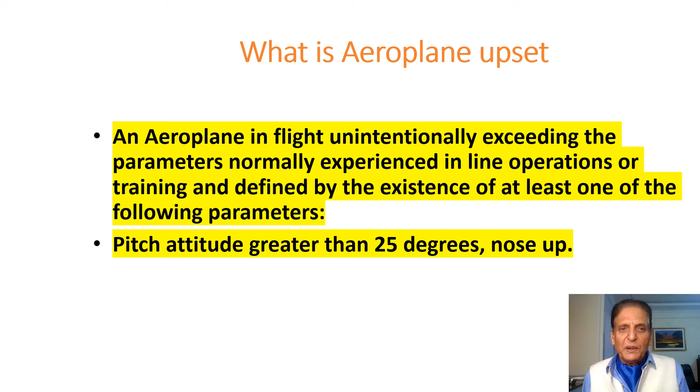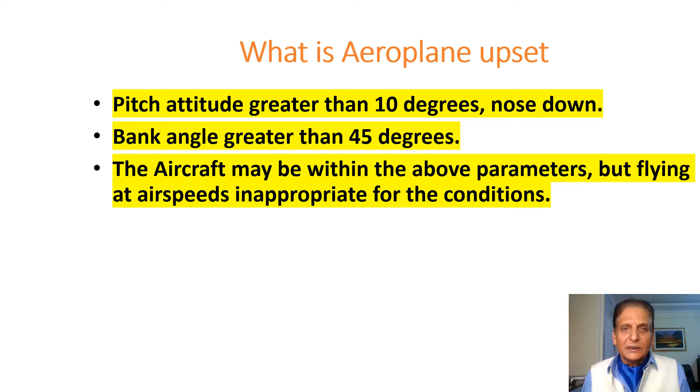First, we shall discuss what is aeroplane upset. An aeroplane in flight unintentionally exceeding the parameters normally experienced in line operations or during training and defined by the existence of at least one of the following parameters. First one is pitch attitude greater than 25 degrees nose up, pitch attitude greater than 10 degrees nose down, bank angle greater than 45 degrees. The aircraft may be within the above parameters, but flying at speeds inappropriate for the conditions.

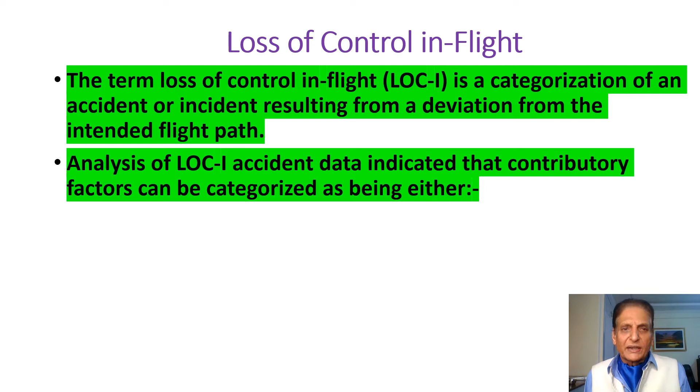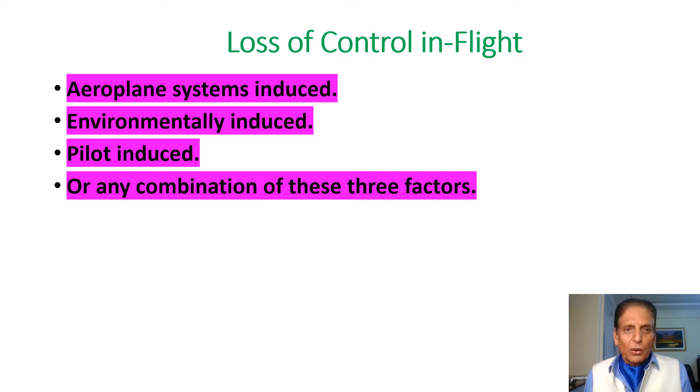Now we shall discuss loss of control in flight. The term loss of control in flight is a categorization of an accident or incident resulting from a deviation from the intended flight path. Analysis of loss of control in flight accident data indicate that contributory factors can be categorized as being either aeroplane systems induced, environmentally induced, pilot induced, or any combination of these three factors.

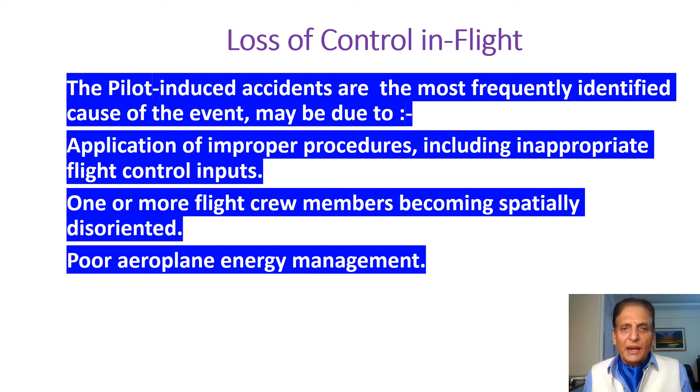The pilot-induced accidents are the most frequently identified cause of the event. May be due to application of improper procedures, including inappropriate flight control inputs, one or more flight crew members becoming spatially disorientated, and poor aeroplane energy management. One or more flight crew members being distracted, improper training, intentional low flying, heavy airplane wake and clear air turbulence, severe weather turbulence, and icing conditions.

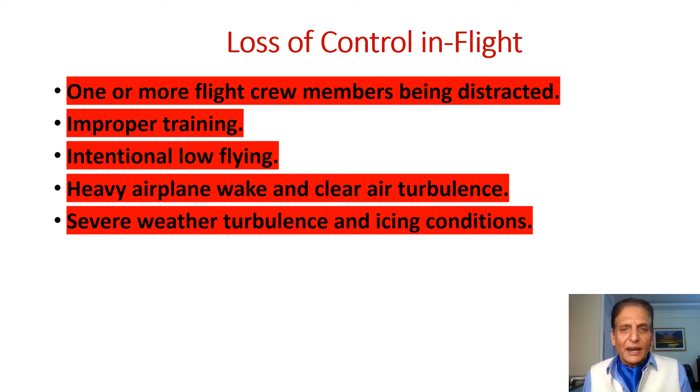Now we shall discuss threat and error management. Threat and error management is a method used to help maximize safety margins and minimize risks by first identifying threats to successful operation accomplishment and then determining ways to mitigate or eliminate the identified threats. The threat and error management concept is to have pilots consider not only the external influences that impact safety, but also to consider their own reactions to those influences as well as mistakes they make in the conduct of a flight.

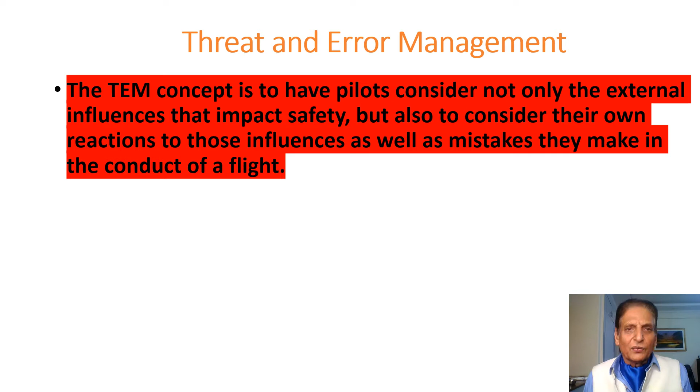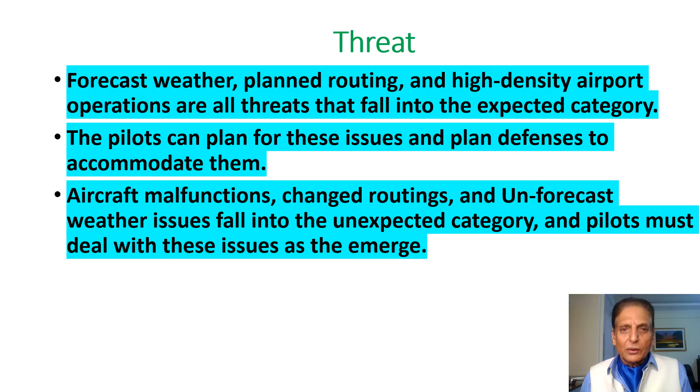Now we shall talk about threats. Threats are those events that are beyond the control of the pilots, which increase flight complexity, requiring flight crew management and attention. Threats are further divided into expected and unexpected. Forecast weather, planned routing, and high density airport operations are all threats that fall into the expected category. The pilots can plan for these issues and plan defenses to accommodate them. Aircraft malfunctions, changed routings, and unforecast weather issues fall into the unexpected category, and pilots must deal with these issues as they emerge.

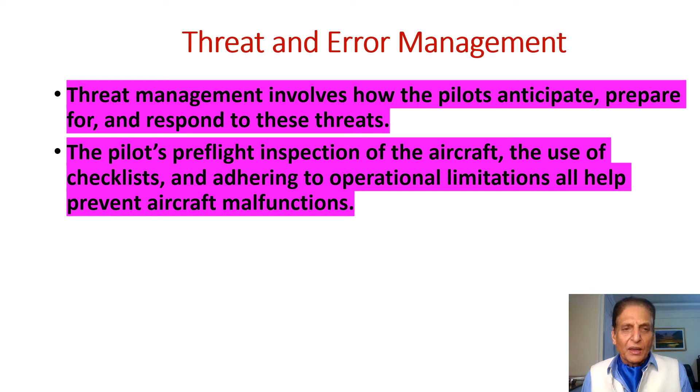Threat management involves how the pilots anticipate, prepare for, and respond to these threats. The pilot's pre-flight inspection of the aircraft, the use of the checklists, and adhering to operational limitations all help prevent aircraft malfunctions. A thorough weather briefing, use of airborne weather radar, and periodic in-flight weather updates are all parts of managing threat due to weather.

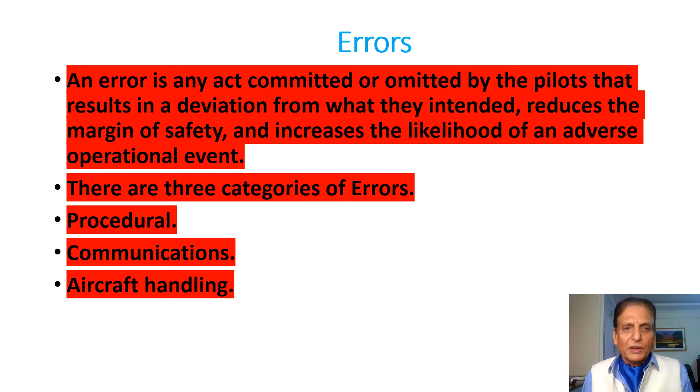Now we shall talk about errors. An error is any act committed or omitted by the pilots that results in a deviation from what they intended, reduces the margin of safety, and increases the likelihood of an adverse operational event. There are three categories of errors: procedural, communications, and aircraft handling. Procedural errors involve pilot divergence from policy, regulations, aircraft flight manual standards or procedures. Examples include accidentally missing a checklist step or purposely omitting said step.

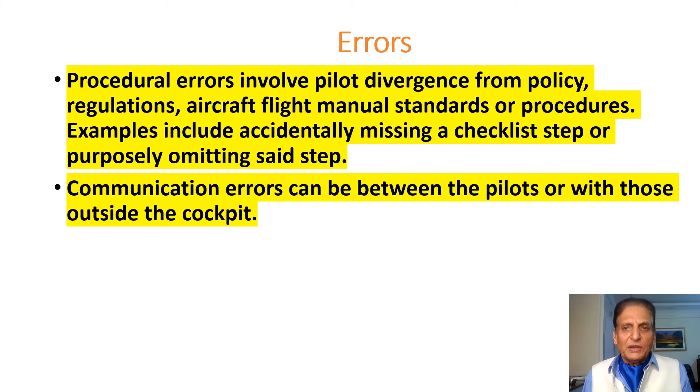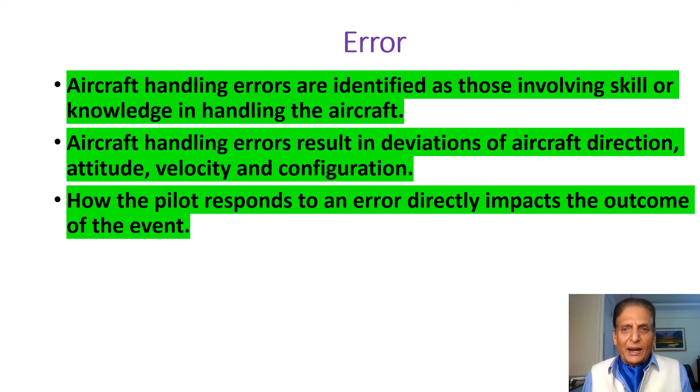Communication errors can be between the pilots or with those outside the cockpit. Aircraft handling errors are identified as those involving skill or knowledge in handling the aircraft. Aircraft handling errors result in deviations of aircraft direction, attitude, velocity, and configuration. How the pilot responds to an error directly impacts the outcome of the event. First of all, the error must be detected. An error that is not detected cannot be managed.

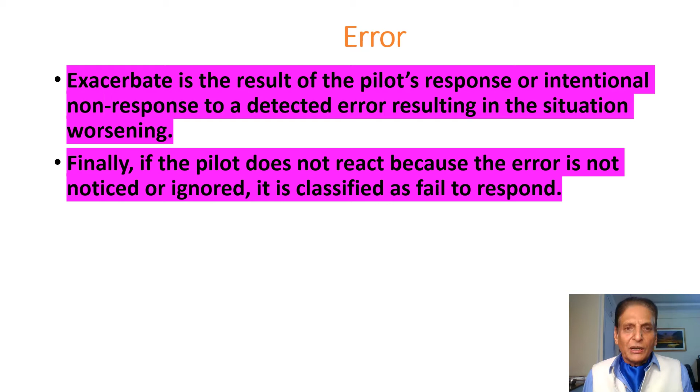If the pilot detects the error and the error is managed appropriately without additional error and without significant effect, the error is said to result in a trap. That is, the error has been trapped. Exacerbate is the result of the pilot's response or intentional non-response to a detected error, resulting in the situation worsening. Finally, if the pilot does not react because the error is not noticed or is ignored, it is classified as fail to respond.

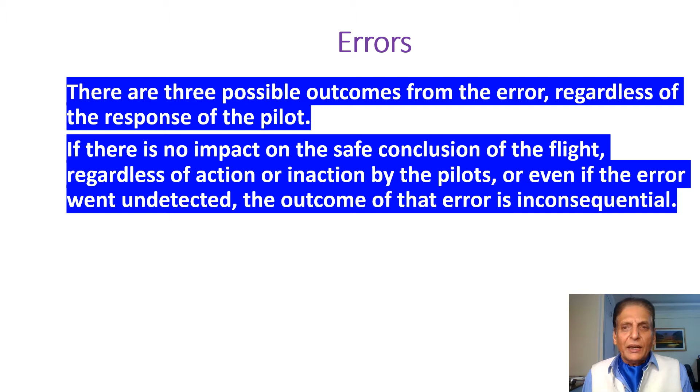There are three possible outcomes from the error, regardless of the response of the pilot. If there is no impact on the safe conclusion of the flight, regardless of action or inaction by the pilots, or even if the error went undetected, the outcome of that error is inconsequential. The pilot, in responding to this error, might commit an additional error, and that error must also be detected and managed by the pilot. Third and most critical is the pilot's response, which may result in an undesired aircraft state.

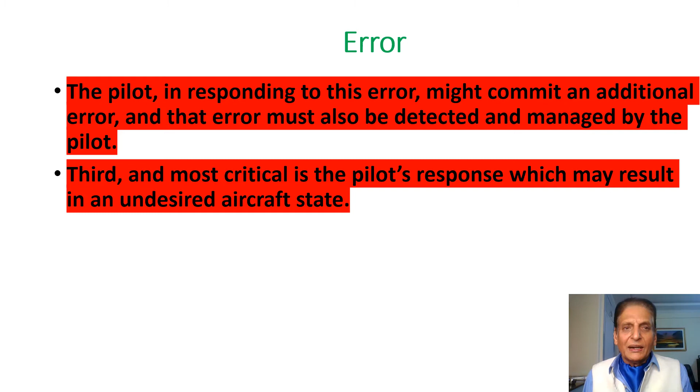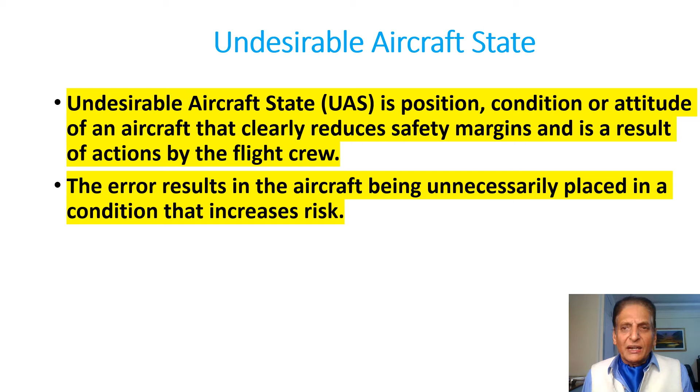Now we shall discuss undesirable aircraft state. Undesirable aircraft state is position, condition, or attitude of an aircraft that clearly reduces safety margins and is a result of actions by the flight crew. The error results in the aircraft being unnecessarily placed in a condition that increases risk.

This includes incorrect vertical or lateral navigation, unstable approaches, low fuel state, lining up for the wrong runway, and reduced separation.

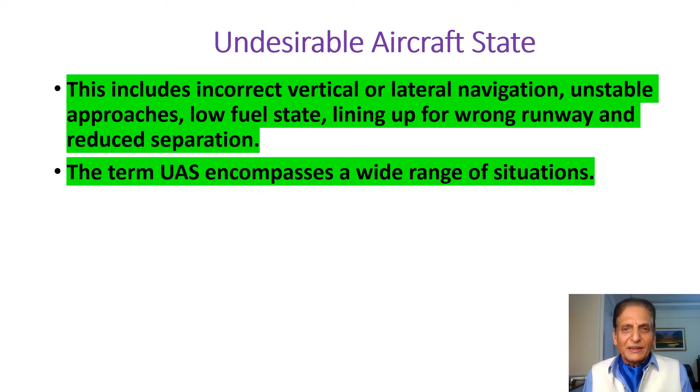The term undesirable aircraft state encompasses a wide range of situations.

Being at the wrong altitude constitutes an undesirable aircraft state. If deviation in pitch, bank, or airspeed becomes severe enough, the undesirable aircraft state moves into the category of an upset, with an accident or incident resulting from an upset event falling into the classification of a loss of control in flight.

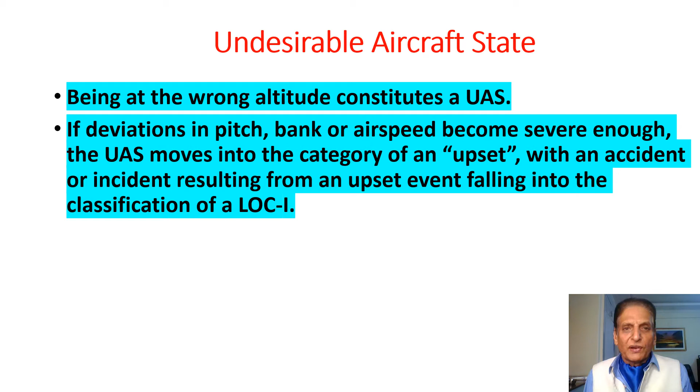In response to the undesirable aircraft state, the pilot may apply appropriate techniques and strategies to mitigate the situation, or the pilot may make control inputs that create further deviation from the desired aircraft state and exacerbate the situation, or the pilot may fail to respond.

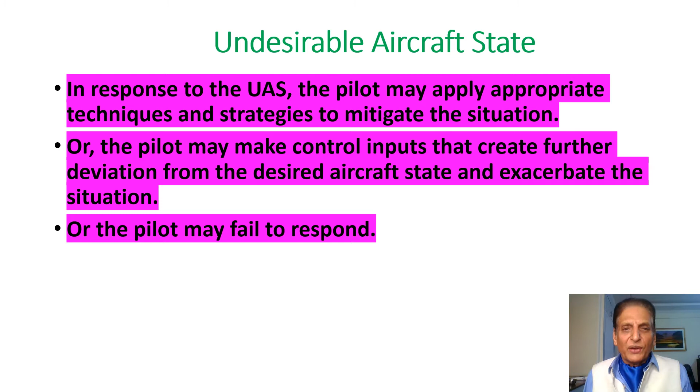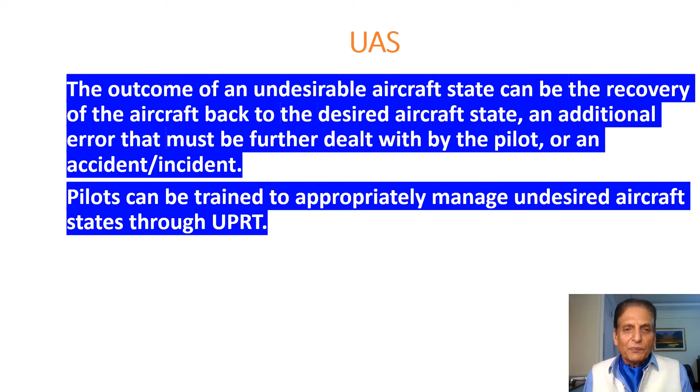The outcome of an undesirable aircraft state can be the recovery of the aircraft back to the desired aircraft state, an additional error that must be further dealt with by the pilot, or an accident or incident. Pilots can be trained to appropriately manage undesired aircraft state through upset prevention and recovery technique training.

Now we shall discuss how we can integrate threat and error management and upset prevention and recovery techniques. Pilots can significantly increase flight safety by integrating UPRT considerations into their TEM process.

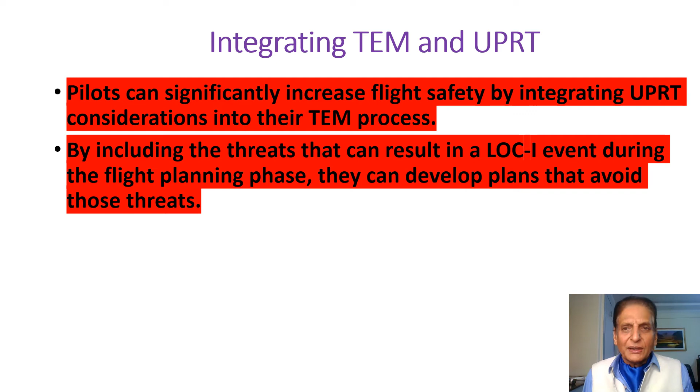By including the threats that can result in a loss of control in flight event during the flight planning phase, they can develop plans that avoid those threats.

By keeping loss of control in flight threats in mind during the conduct of the flight, the pilot will be more likely to recognize the precursors to a loss of control in flight and take early action to prevent a loss of control in flight occurrence.

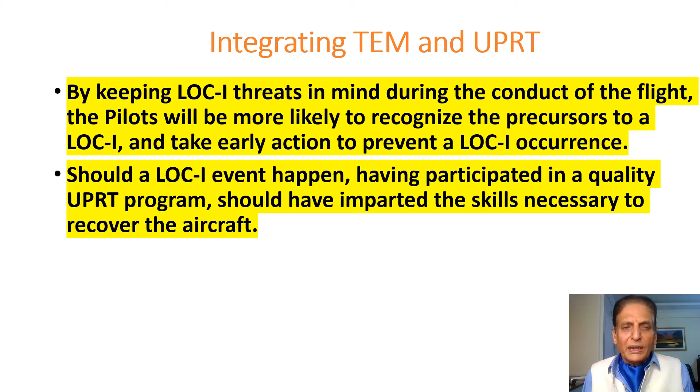Should a loss of control in flight event happen, having participated in a quality UPRT training program is very important, as it should have imparted the skills necessary to recover the aircraft. So here the emphasis is on quality UPRT training.

Threats that can be anticipated should be taken into consideration during flight planning. Forecast weather that includes thunderstorms, wind shear, or icing all fall into this category. Wake turbulence also has a component that falls within this category.

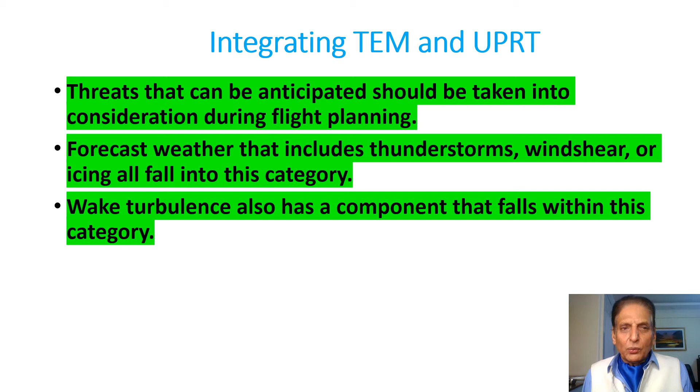If the flight plan includes operations in areas where heavy air traffic is expected, the pilot should take this into consideration during planning. The pilot, with an awareness of preceding traffic, the airfield winds, and the dynamics of wake turbulence, can plan the approach to minimize the possibility of encountering wake turbulence.

While the best mitigation is to avoid the threat completely, oftentimes the flight is of such priority that other forms of mitigation are necessary.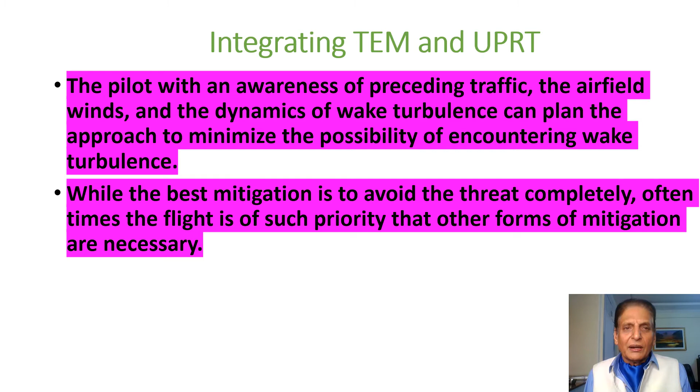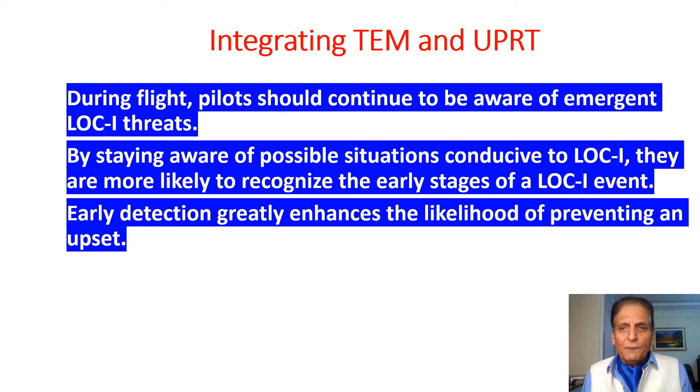During flight, pilots should continue to be aware of emergent loss of control in flight threats. By staying aware of possible situations conducive to loss of control in flight, the pilots are more likely to recognize the early stages of a loss of control in flight event. Early detection greatly enhances the likelihood of preventing an upset.

This awareness is especially important during flight with the autopilot engaged. It is possible that the pilot will assume a lower level of vigilance if the flight is on autopilot, but in the presence of a loss of control in flight threat, such a relaxed attitude can lead to a sudden upset. The autopilot will attempt to keep the aircraft within the desired state using more and more of its control authority.

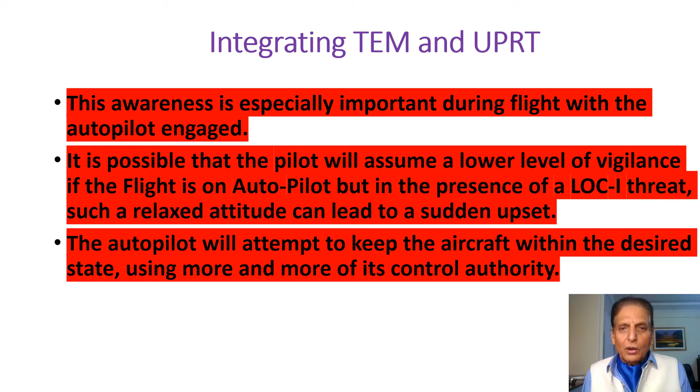If the limits of authority are exceeded, most autopilots will disengage suddenly, allowing the controls to return to neutral in most aircraft. The counter upset control inputs previously held by the autopilot will be removed, and the aircraft may be rapidly placed into an upset condition.

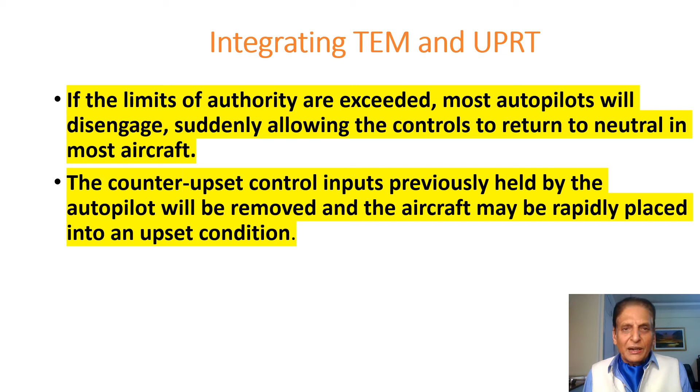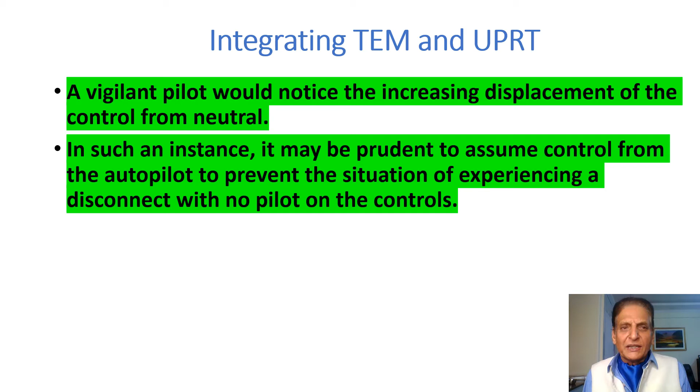A vigilant pilot would notice the increasing displacement of the control from neutral. In such an instance, it may be prudent to assume control from the autopilot to prevent the situation of experiencing a disconnect with no pilots on the controls.

A further byproduct of active awareness of loss of control in flight threats is that the pilot is less likely to be startled should an upset occur. A pilot who is unaware may have as much as twice the reaction time as that of a pilot who is aware of the potential need for intervention.

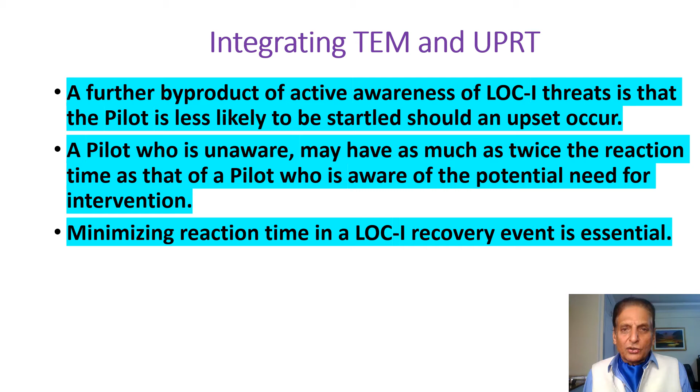Minimizing reaction time in a loss of control in flight recovery event is very essential. Research has shown that the window of opportunity available to resolve an airplane upset is often less than 10 seconds to initiate correct recovery action.

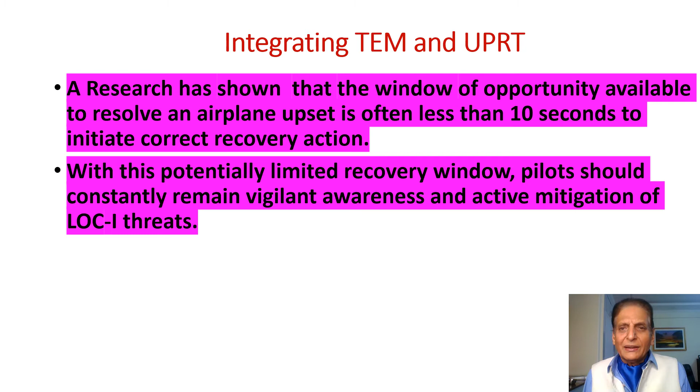With this potentially limited recovery window, pilots should constantly remain vigilant, aware, and actively mitigating loss of control in flight threats.

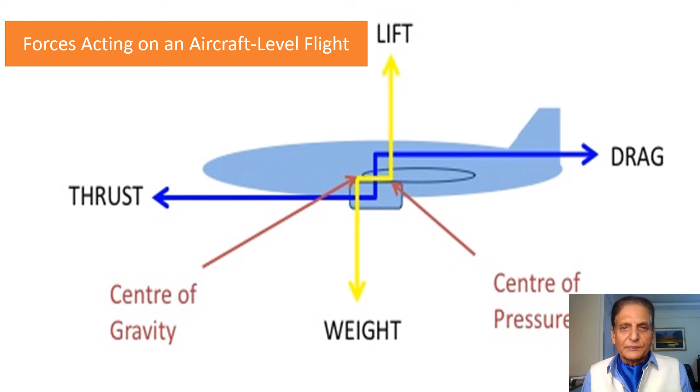Now I shall refresh your memory about some aerodynamics. In this figure you see the forces acting on an aircraft in level flight: lift, weight, thrust, drag, center of gravity, and center of pressure. These are the four forces that act on an aircraft in flight: lift, weight, thrust, and drag.

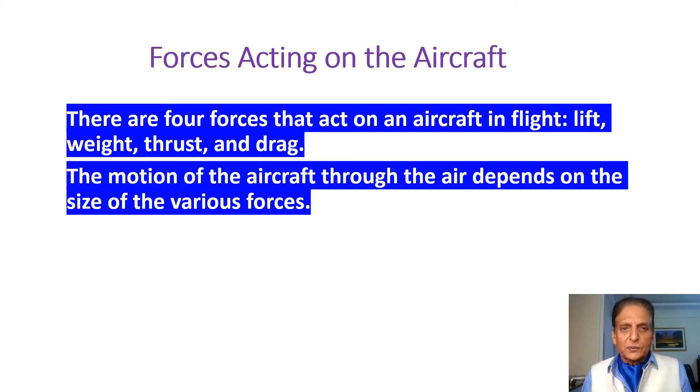The motion of the aircraft through the air depends on the size of various forces. Lift and drag are aerodynamic forces that depend on the shape and size of the aircraft, air conditions, and flight velocity.

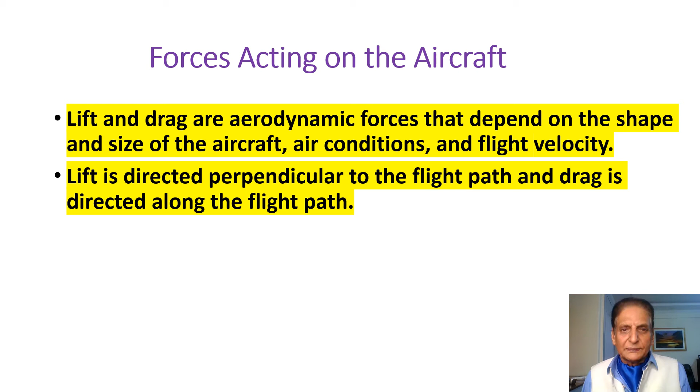Lift is directed perpendicular to the flight path, and drag is directed along the flight path. The ratio of lift to drag is an indication of the aerodynamic efficiency of an airplane. An airplane has a high L/D ratio if it produces a large amount of lift and a small amount of drag.

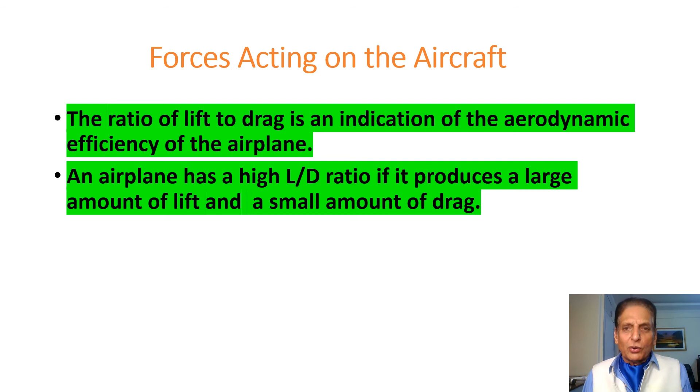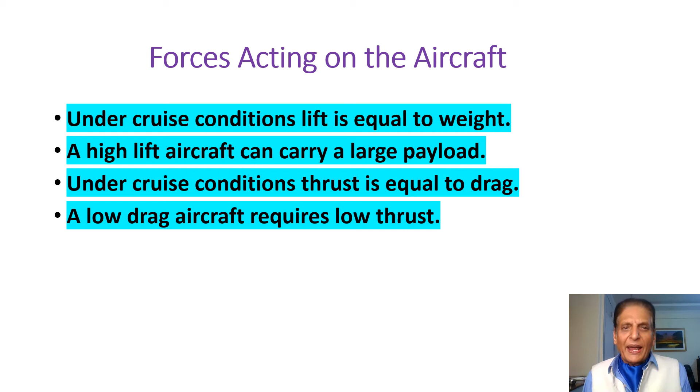Under cruise conditions, lift is equal to weight, and thrust is equal to drag. A high lift aircraft can carry a large payload, while a low drag aircraft requires low thrust.

An aircraft with a high L/D ratio can carry a large payload for a long time and over a long distance.

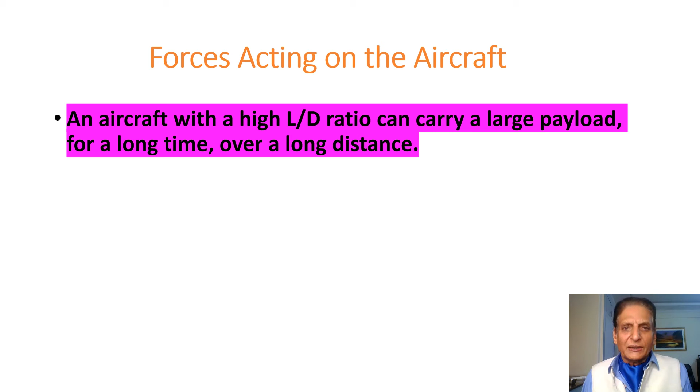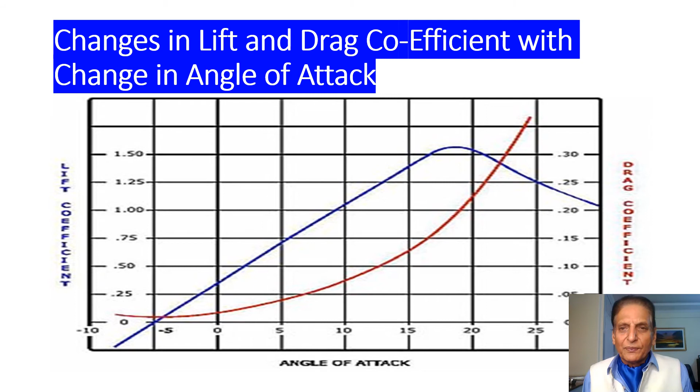This figure shows changes in lift and drag coefficient with change in angle of attack. You can see how the lift coefficient keeps increasing as angle of attack is increased, till the aircraft reaches a stalling angle of attack. Thereafter, the lift coefficient starts dropping. The drag coefficient gradually increases with angle of attack, reaching a very high value at high angle of attack.

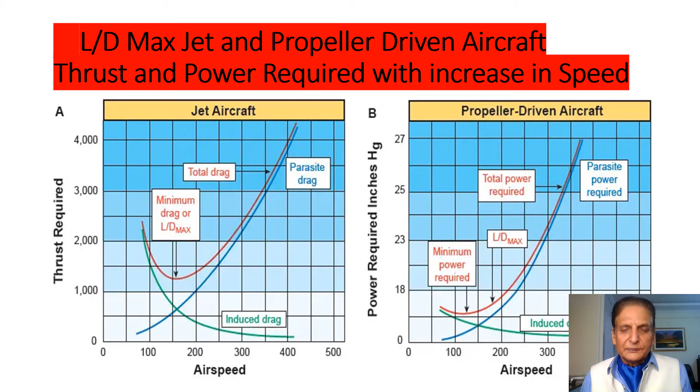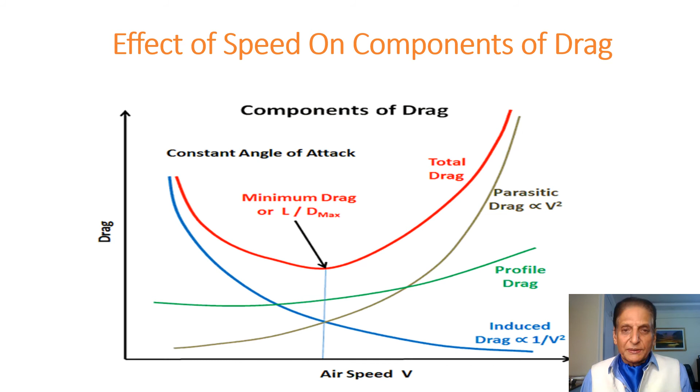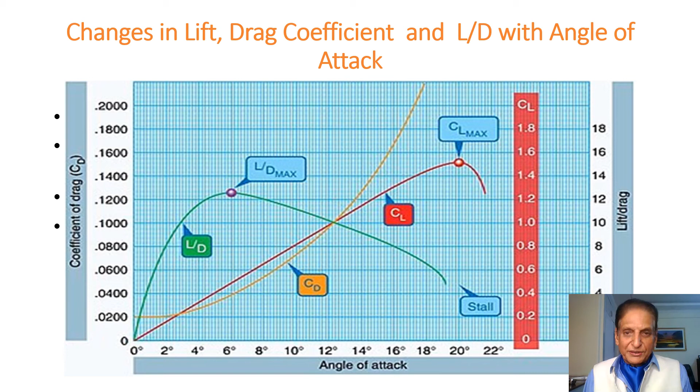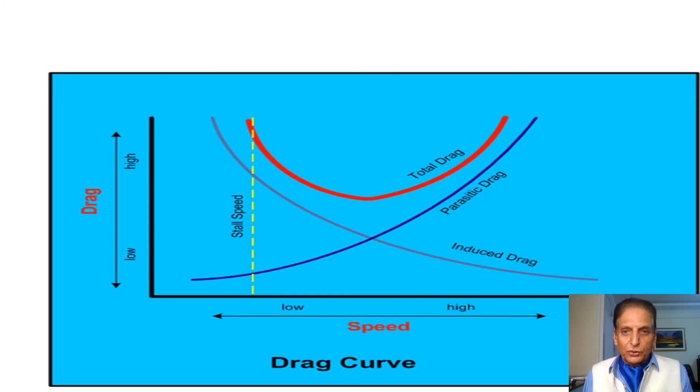This figure shows the total drag, induced drag, and parasite drag. With increase in speed, you can see the effect on induced drag, parasite drag, and total drag, and also the stall speed shown in this picture.

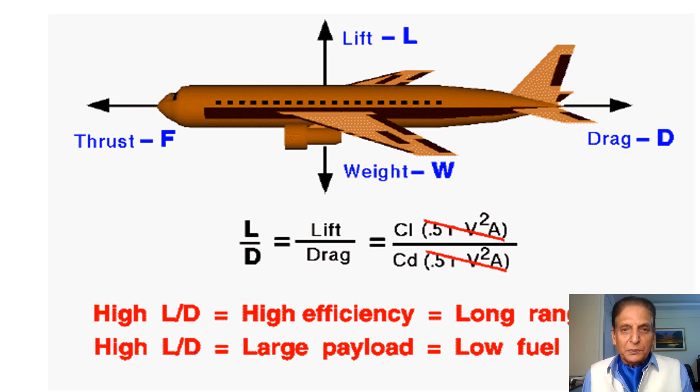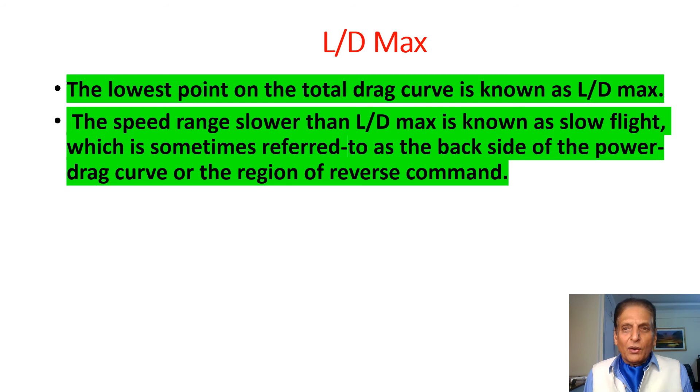The lowest point on the total drag curve is known as L by D max. The speed range slower than L by D max is known as slow flight, sometimes referred to as the backside of the power drag curve or the region of reverse command. Speed faster than L by D max is considered normal flight, or the front side of the power drag curve.

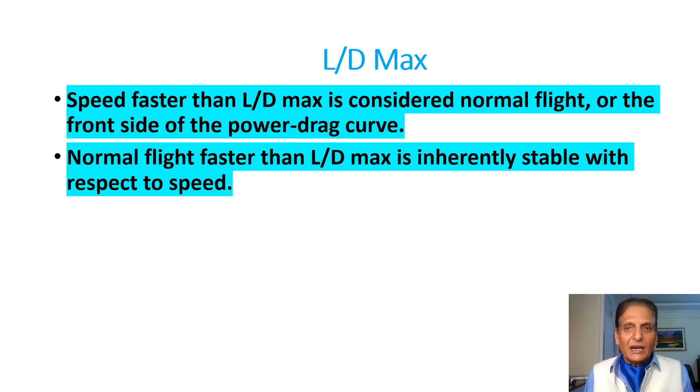Normal flight faster than L by D max is inherently stable with respect to speed. When operating in level flight at constant airspeed with constant thrust setting, any airspeed disturbance such as turbulence will result in the airspeed eventually returning to the original airspeed when total thrust has not changed.

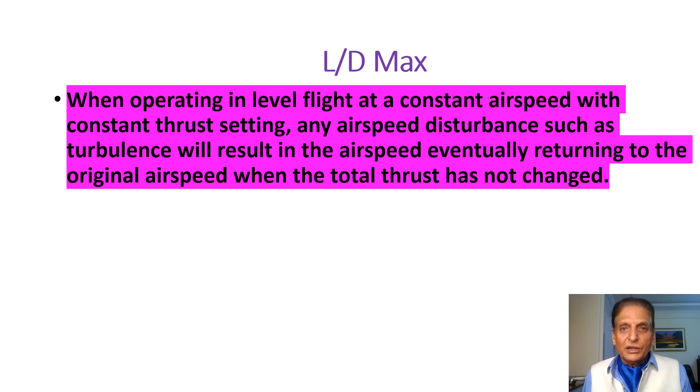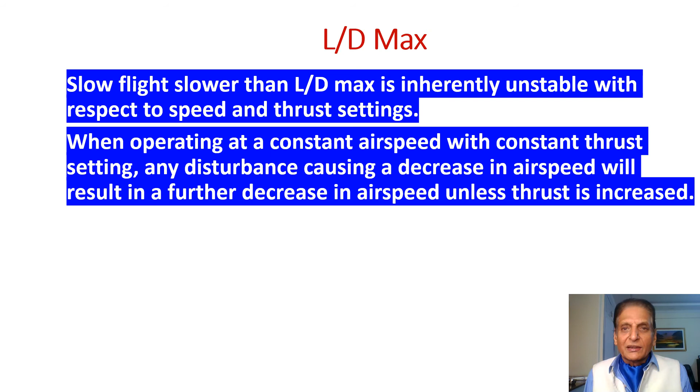Slow flight slower than L by D max is inherently unstable with respect to speed and thrust settings. When operating at constant airspeed with constant thrust setting, any disturbance causing a decrease in airspeed will result in a further decrease in airspeed unless thrust is increased. The lower speed subjects the airplane to increased drag, which causes a further decrease in airspeed, potentially resulting in a stalled flight condition.

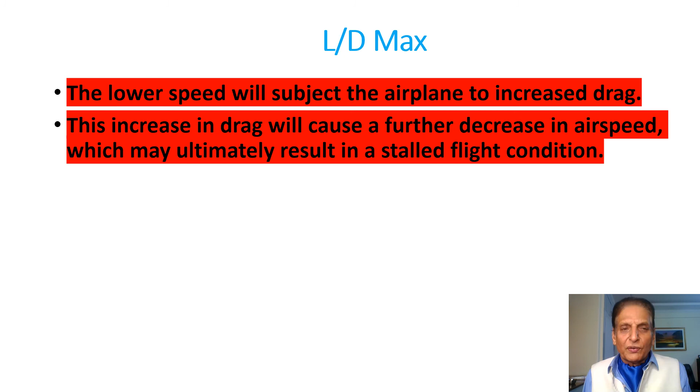Flight slower than L by D max at high altitudes must be avoided due to the inefficiency and inherent instability of the slow flight speed range. When operating slower than L by D max, where total drag exceeds total thrust, the airplane will be unable to maintain altitude, and the only remaining option to exit the slow flight regime is to initiate a descent.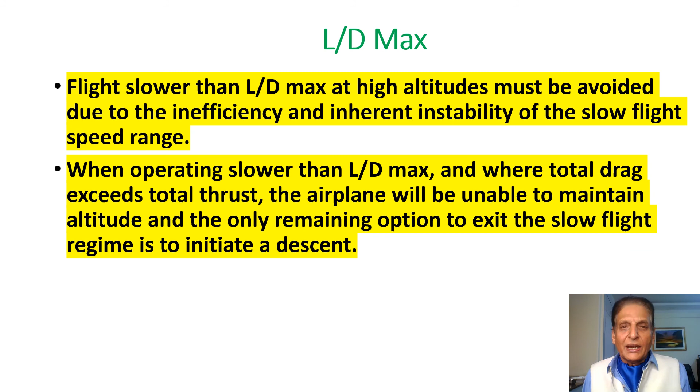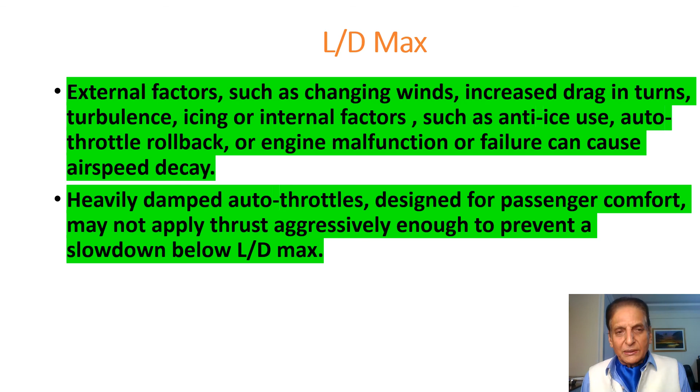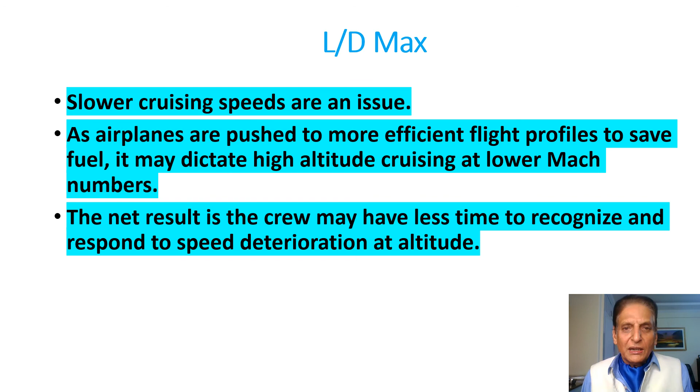Slower cruising speeds are an issue. As airplanes are pushed to more efficient flight profiles to save fuel, it may dictate high altitude cruising at lower Mach numbers. The net result is that the crew may have less time to recognize and respond to speed deterioration at altitude.

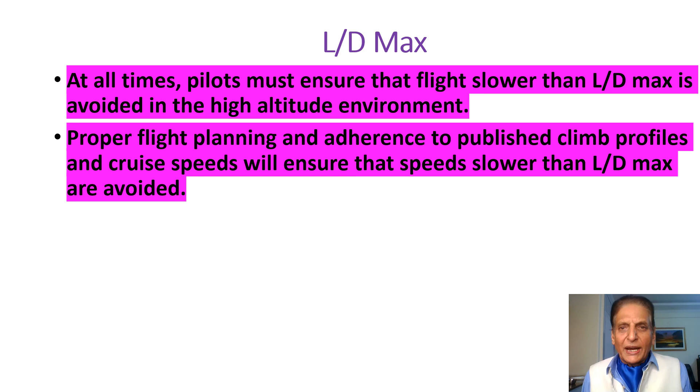At all times, pilots must ensure that flight slower than L/D max is avoided in the high altitude environment. Proper flight planning and adherence to published climb profiles and cruise speeds will ensure that speeds slower than L/D max are avoided.

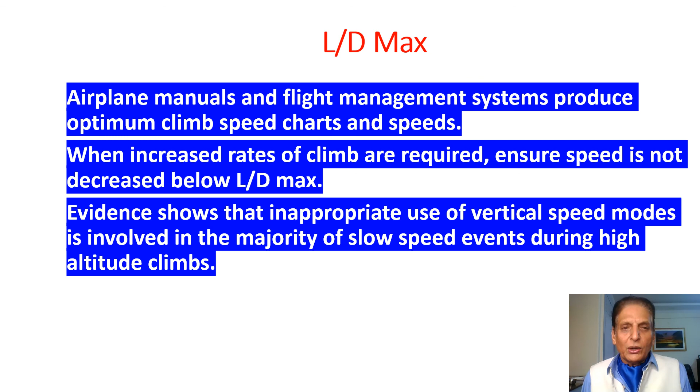A number of fatal accidents have occurred due to the inability of pilots to recover from unusual attitudes. Hence, it is essential that all pilots are knowledgeable and aware of the various factors which can lead to unusual attitudes, and they should also know the correct recovery procedures.